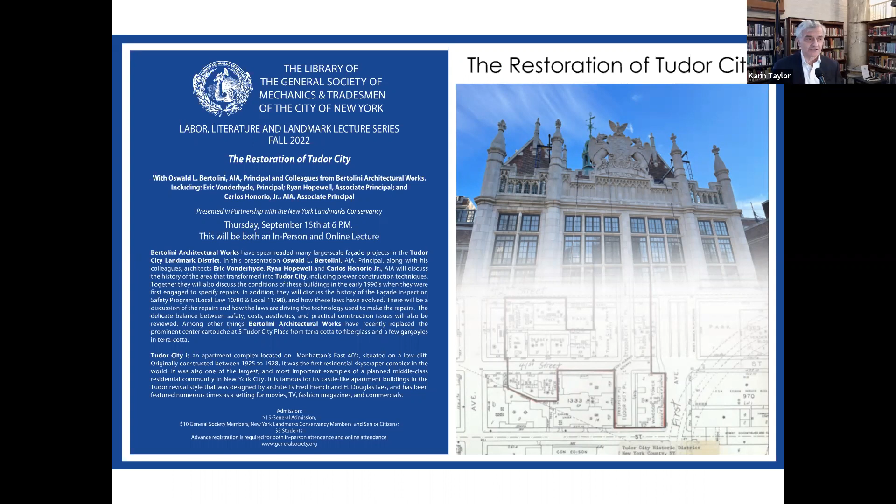I have to say it's a pleasure to be here, and I'm trying to highlight a few of the interesting points of the design and the whole ethos of what makes Tudor City Place. One interesting thing architecturally is the style of construction, but I'll focus more on the materials. The style is sort of a revival neo-Gothic, and you can see that in the buildings—some photographs are going to come later on. The most interesting thing to us is that the building has some noble materials, like granite at the base.

There's some limestone at the base of the building, the first and second story typically. But as you go up, you have the body of the buildings developed in common brick, and they have heavy ornamentation, which as soon as you get up, it's all made of terracotta.

This is a very interesting material, and that's what I want to talk about, because people sometimes don't recognize it for what it is. It is the element that we have to work the hardest on, and it's the most complex to repair, replace, and preserve over the years.

Originally, terracotta was considered a fantastic material. It was a huge progress, and it had a lot of advantages for the developers of the time. First of all, it was way cheaper than real stone, so that was a huge plus.

Then, as a material, it was fireproof. In addition, it was much lighter than full stone, because as you'll see later, terracotta is hollow. And to top it all off, it was pretty much waterproof, because part of the process ends with a glaze, which makes it totally waterproof. So except for the joints, the water didn't go in.

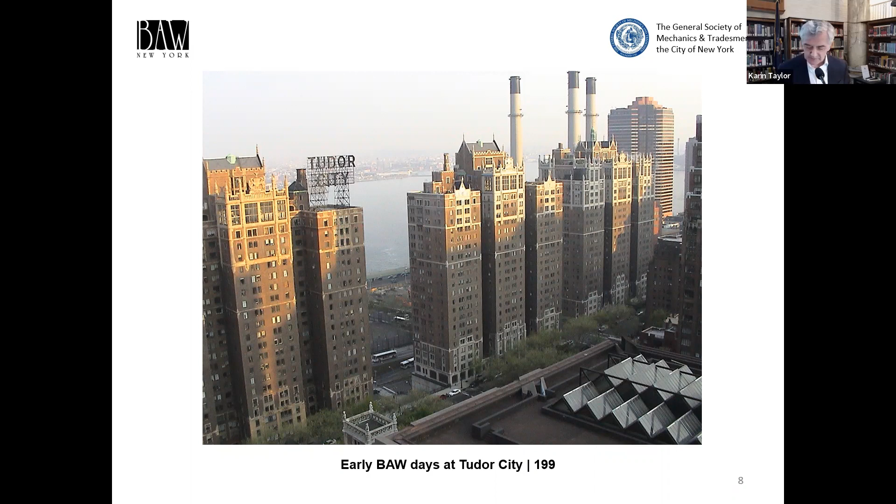This will give you a sense of what we saw when we first got to the buildings. That was in 1999, eight years into our mission of trying to save the buildings. The terracotta has been removed there, and if you look inside, the dark part is rusted steel.

We had to do several deep interventions, not only to repair the exterior fabric, but going in there and, in some cases, reinforcing or replacing some of the steel members. The buildings are very noble, they're overbuilt, and they work as a mixed structure, so nothing collapsed. That was a little miracle in itself.

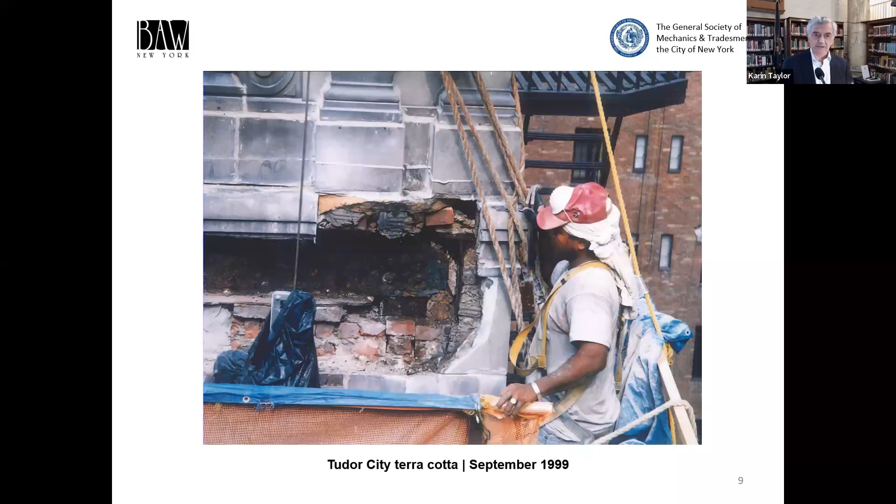Part of explaining to you what terracotta is—I think some people have a sense, but basically it's clay, very finely ground and selected. There are few quarries where you can get materials that perform well, because you're looking for consistency, you're looking for color, you're looking at how this will react when it gets baked in a kiln.

As much as it will look like stone when it's all done—this is an old original drawing, not from these buildings, but it shows how this used to be put together. The terracotta is hollow, and some of the voids are filled with masonry, basically brick and mortar. There are hooks, steel clips, and double angles back to back that hold it into place when it projects a lot, typically in cornices and elements like that, and some balconies too.

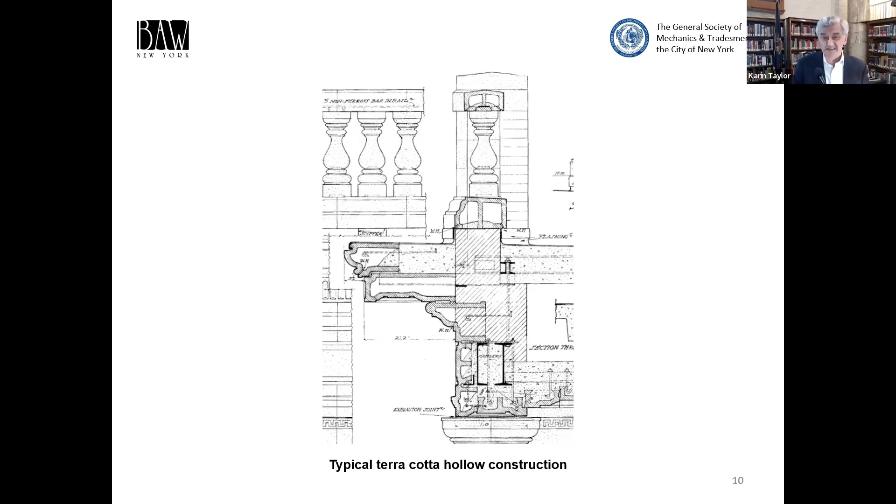So terracotta, when you look at what goes into the buildings, is much heavier, denser, thicker, and, like I said, glazed and waterproofed.

The other consequence I want to note is that once the terracotta becomes porous and water comes in, it starts a pernicious process where the steel inside gets rusted. Steel grows by a factor of 7 or 8 when it turns into rust. Even though rust isn't that strong, it's stronger than most stones and definitely stronger than terracotta, so it will crack it very easily.

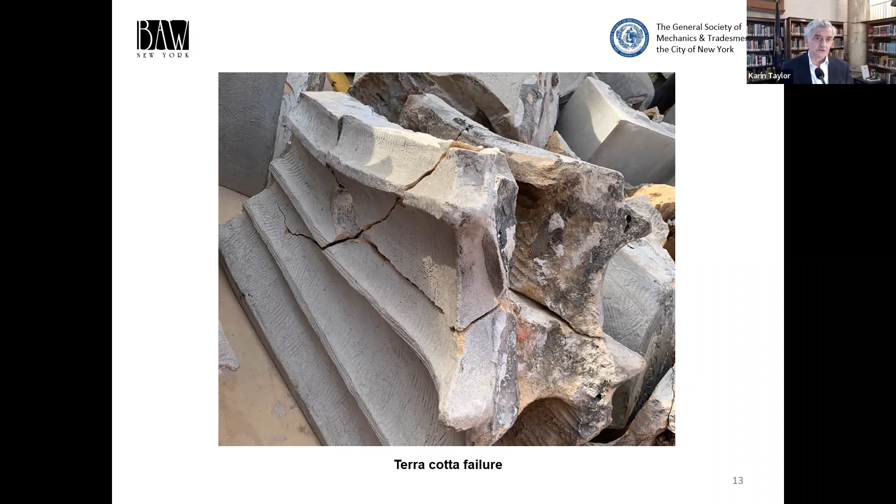So the cracks develop slowly, and water comes in, dirt and contamination come in, water flows through at some point, and eventually it produces cracks that go through the entire unit of terracotta. This makes it hard to repair, but also when it collapses, it becomes a catastrophic failure—sudden, unpredictable. You just can't go by the cracks you observe on the surface.

It's important—there's been a refocusing of the energies of the Department of Buildings over the last, I'd say, 8 or 10 years. They've toughened up the regulations to make sure everybody walking around these buildings is safe. And with good reason.

If you're looking at that, this is a perfect example—this is not Tudor City Place—of how an entire section can collapse suddenly. In this case, you see it became loose and just went down to the street, and most of it seems to be a relatively recent crack. You don't have the dirt of something that's been open for, say, 10 or 12 years.

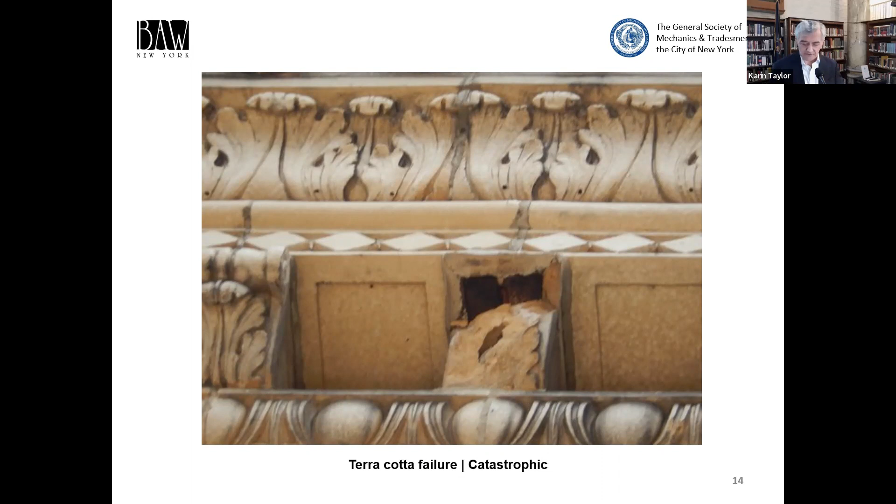That's another example of a critical failure, a catastrophic result. There's no other choice than to rebuild it, like we say in the trade, to the bone. You need to go down, remove everything, figure out how it's put together, and restore the steel substructure that holds it. It's not a real structure like columns holding up your floors, but a substructure that projects from the building—it's cantilevered—and then you build the terracotta around it.

The process is delicate and complicated for us to design. My partner Eric would say it's a lot of fun because we never know what we're going to find once we do the demolition, which is always interesting. We make our best guesses—we have fun doing this in the office, guessing how the structure runs inside. When we do the demo, maybe two-thirds of the time we're right, and the rest of the time we're saying, oh my God, who did this? What were they thinking?

We just opened up a building, not here but down on Broadway, and found an amazing substructure holding up a beautiful terracotta cornice projecting several feet out over the sidewalk. It was floating, sitting on top of a parapet, with a ton of masonry above. So the weight was holding these kind of fingers of steel coming out into the street—unthinkable. But in a certain sense, it's fascinating that these buildings have been around for, some of them, over 100 years. In the case of Tudor City, some of the construction is over 90 years old.

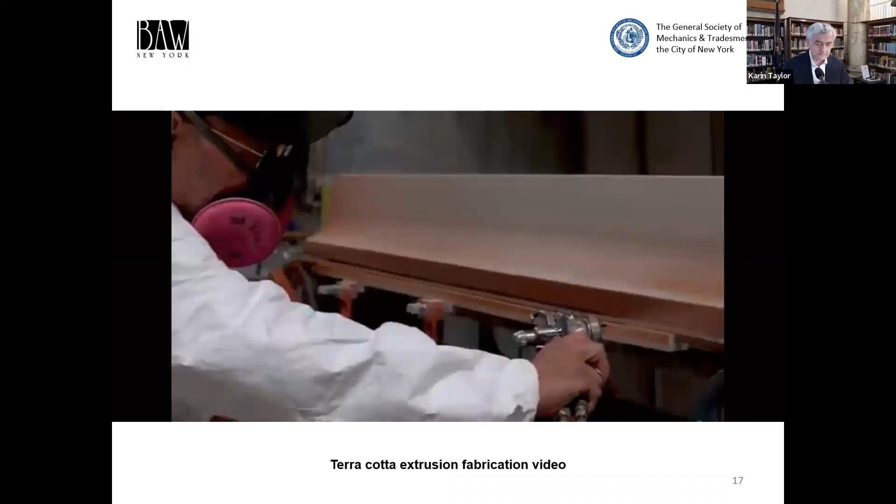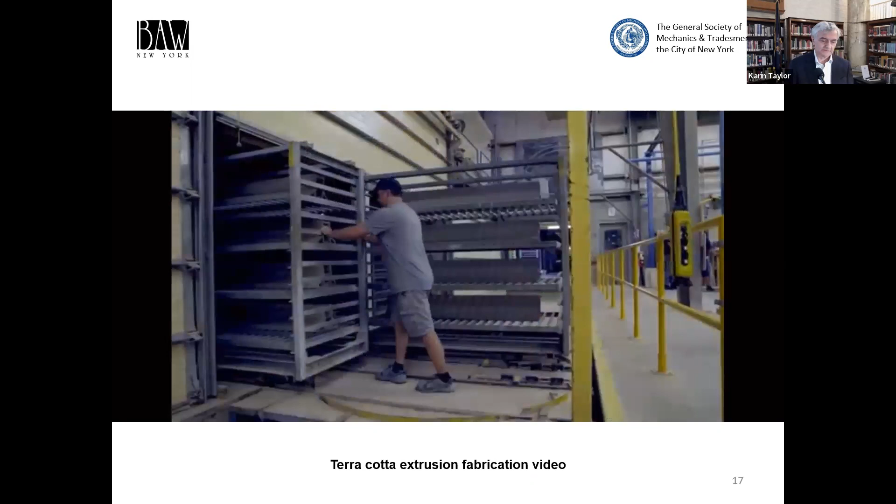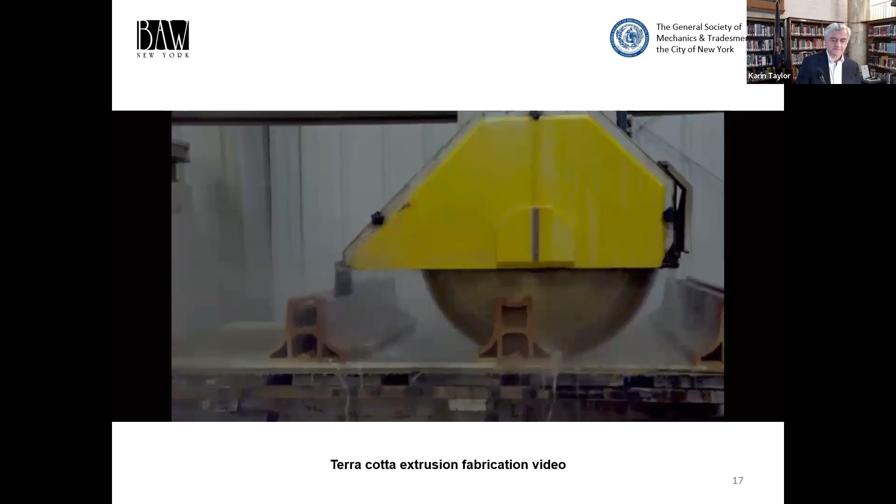Simple process for extrusion, that's all identical. That's a more traditional unit being built by hand. As you can see, you have a form, they're placing all the terracotta and pushing it into place, and then that's going to be dried and go to the kiln.

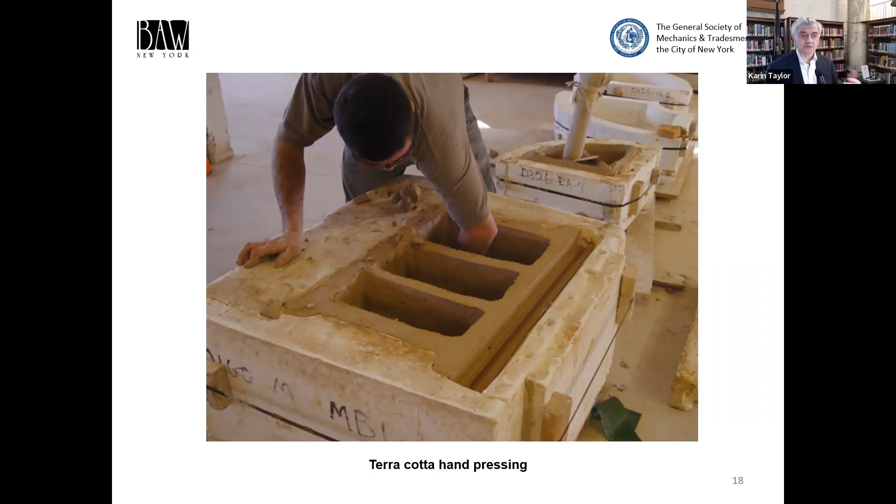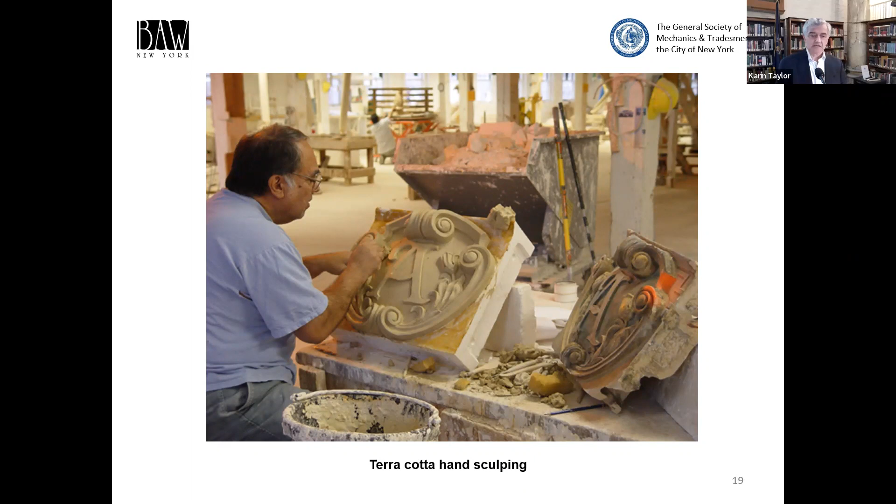The more delicate piece, as you can see, is done and then touched up by hand, which is why these things take so long. It's set up dry first because before you go to the site, you want to make sure that everything fits.

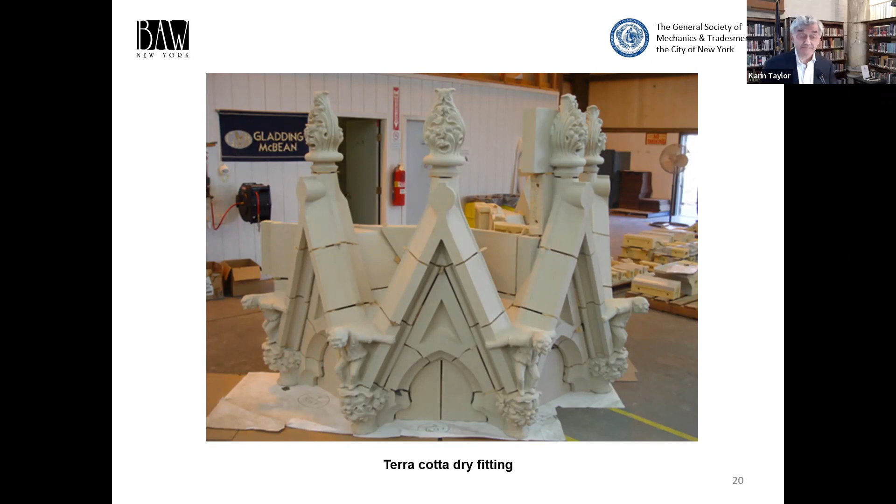We've also worked on many aspects of these buildings' restoration, but it's very important to understand the team effort and cooperation we need from everybody. We work with the Department of Buildings, the Landmarks Preservation Commission, the management companies that run these buildings, and very closely with the boards, who need to take care of their finances, and with the contractors, who do a fantastic job. This is not easy by any means.

You'll see some pictures down the line. And of course, all of this is done with the residents in the building. We appreciate their patience and the love they have for their buildings, because sometimes they're kept off their terraces, or they have pipe scaffolding in front of their windows for weeks and weeks. They do love the buildings, and I think they're gorgeous. We're happy to work with them and be part of the process.

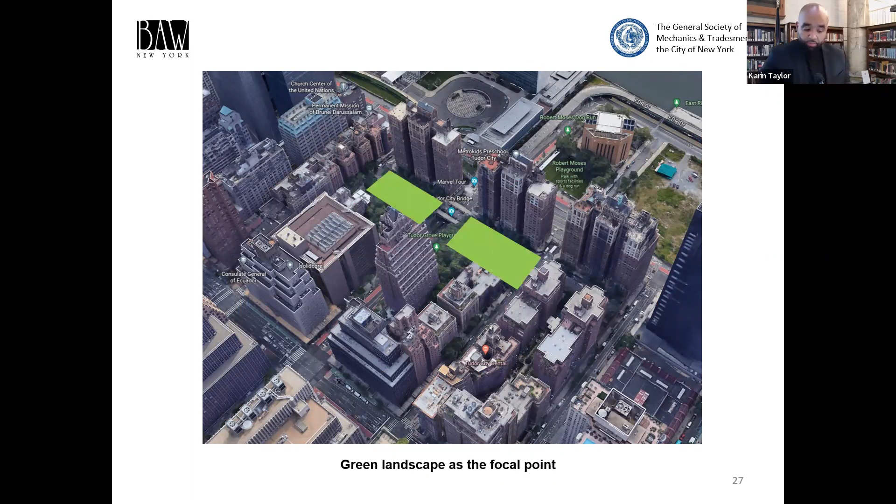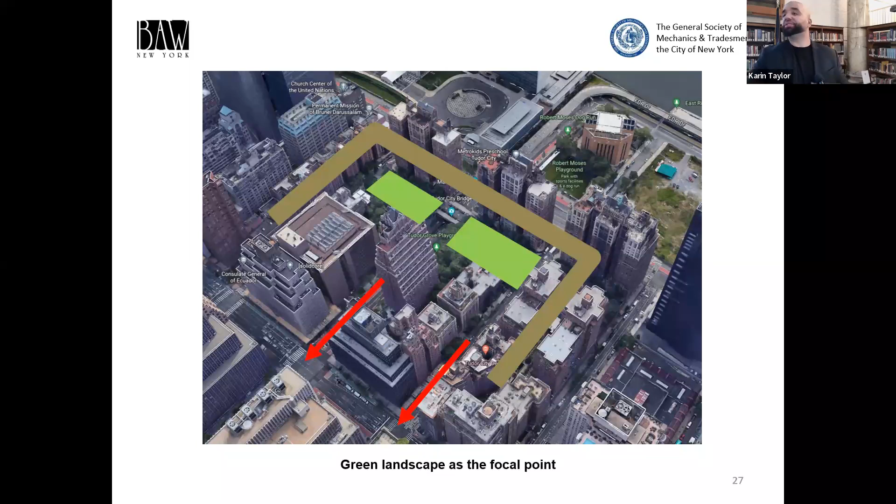The way we interpret the master plan of Tudor City is essentially a robust green landscape as the central focal point, shown there, with the surrounding buildings, and close proximity to Grand Central. That was the key selling point when trying to attract residents. The whole idea behind Tudor City was a city within the city, close to transportation hubs and within walking distance of your office.

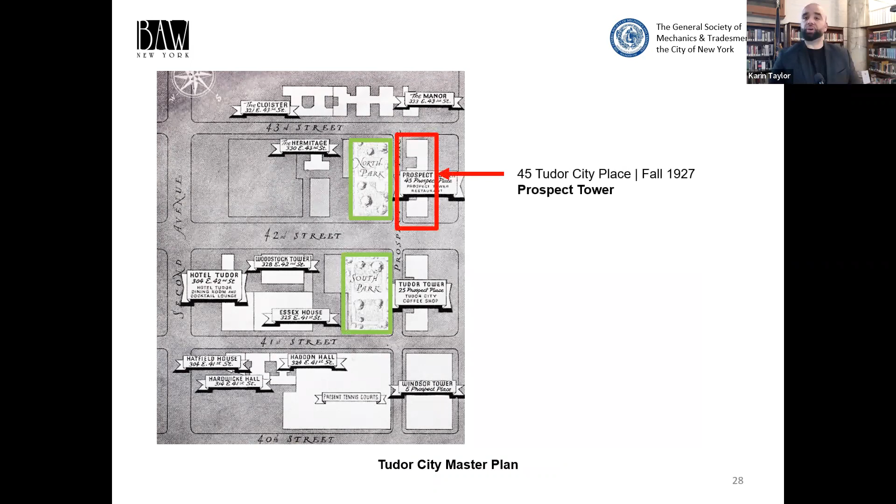I'm just going to highlight the parks. There were 12 buildings constructed originally as part of the master plan, and here are their completion dates.

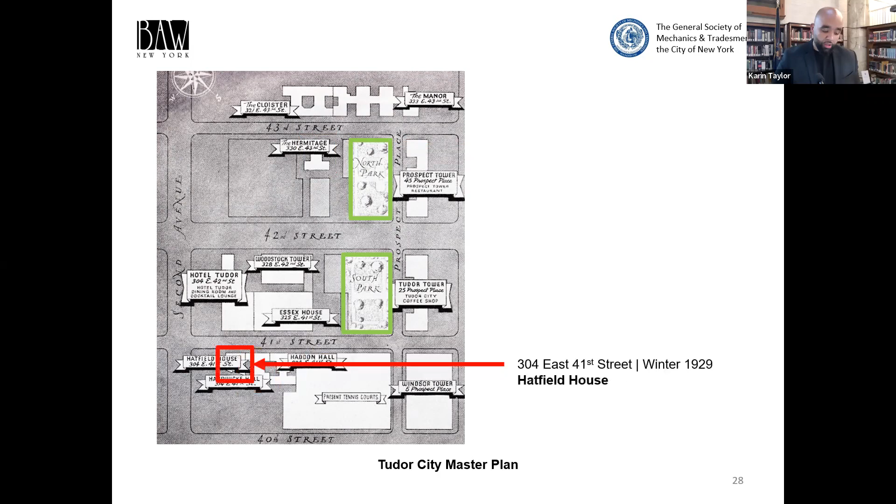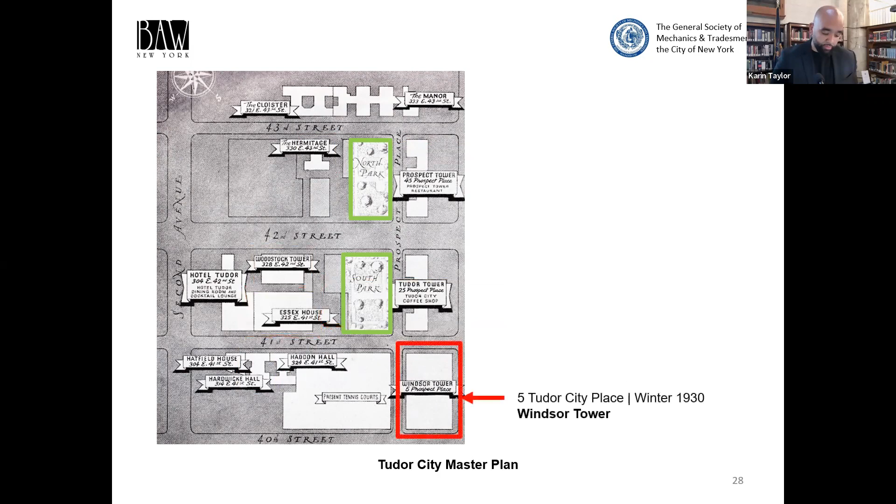That's Prospect Tower, 1927. The Manor, 1927. Tudor Tower, 1928. The Cloister, 1928. The Hermitage, 1928. Haddon Hall, 1929. Hardwicke Hall, 1929. Hatfield House, 1929. Woodstock Tower, 1929. Essex House, 1929.

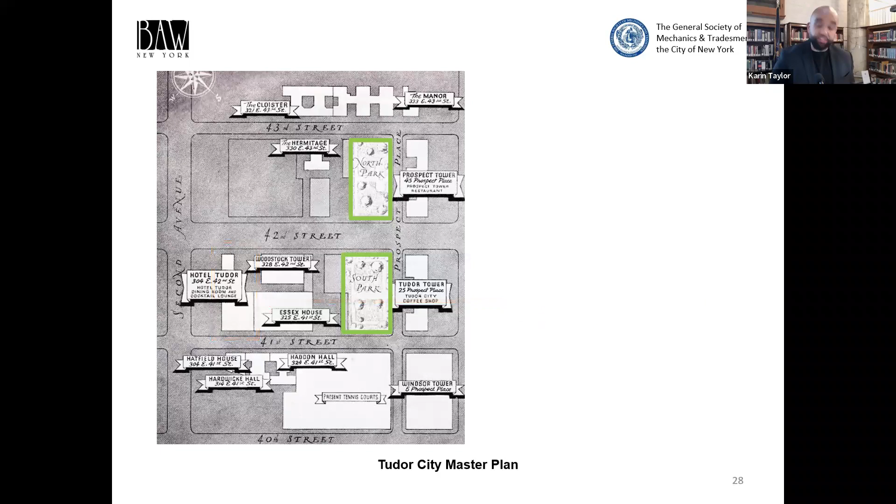And Windsor Tower, 1930. And Hotel Tudor, 1930. So those were the original 12 buildings constructed. Then in 1956, Two Tudor City Place was built, which is called Tudor Gardens.

Now, the area was much different back in the late 1800s. Here's a photo of 42nd Street looking up north on 2nd Avenue.

Before the United Nations, First Avenue was lined up with slaughterhouses, infamously nicknamed Blood Alley.

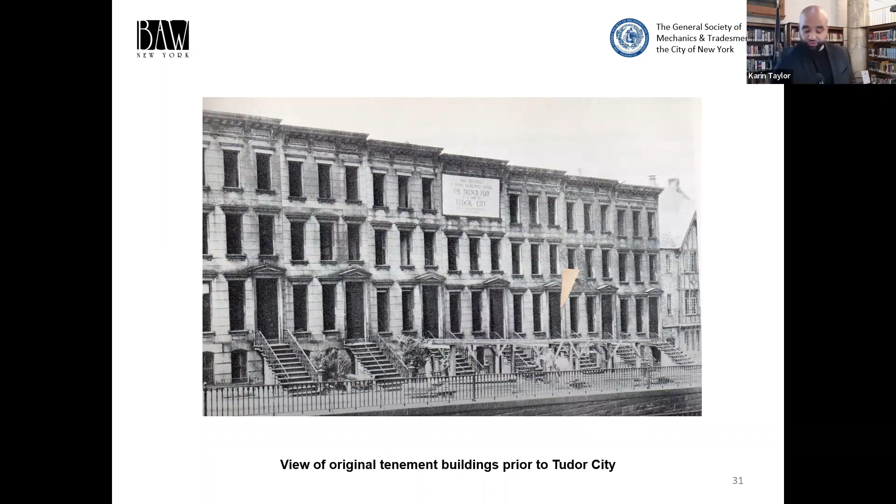The existing tenement buildings help mask the beauty of such a potential site. Fred oversaw all of the obstacles and pushed forward with this unprecedented project. Another picture of the tenement buildings there being bought by Fred.

During the Roaring 20s, Fred was able to attract numerous investors through rigorous ad campaigns to raise the capital required to develop the project. Too bad I was 60 years born too late, I would have invested.

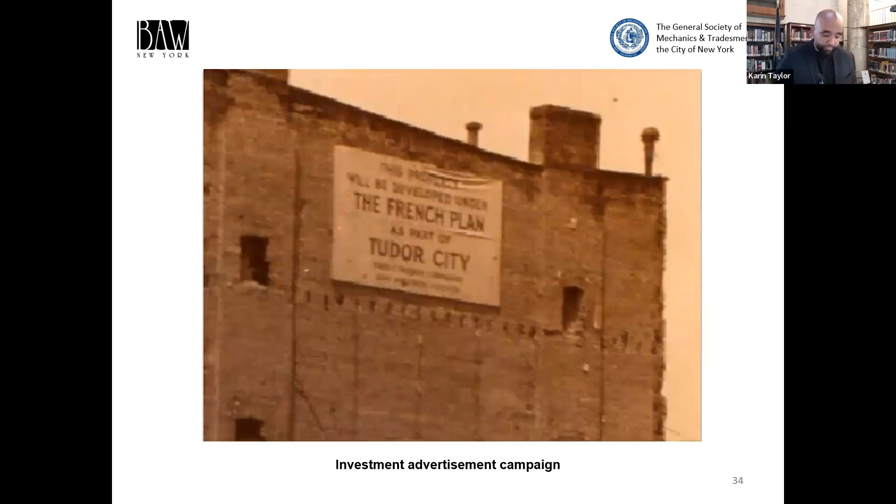Again, the ad campaigns pretty much plastered all over the tenement buildings around this area. Stock certificates, wish I had one.

Fred wanted to provide an outer urban experience within the city, which incentivized those that appreciate walking to work. He advertised Grand Central, one of the city's main transportation hubs, which had major impact on its development and thriving, and was part of the marketing campaign for future residents, as you see here with this ad.

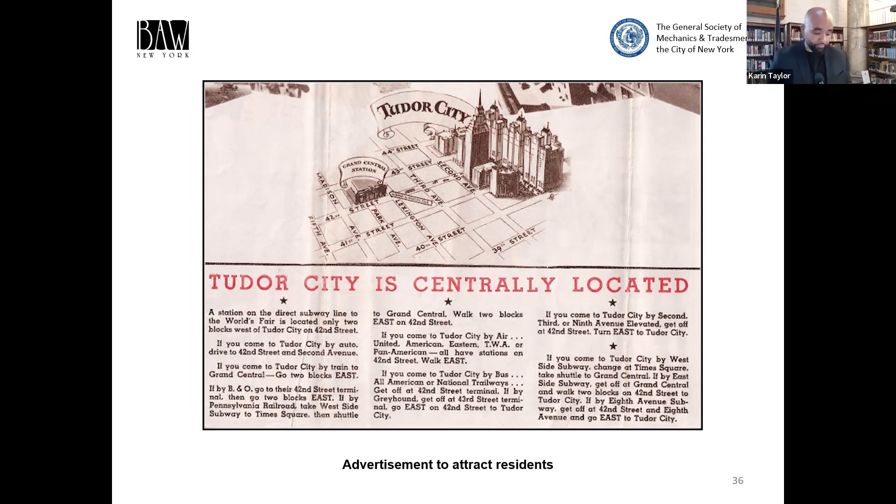Another ad, and one more. I won't go into the details of that one, but you can get what's going on. Tudor City Green Landscape is an overview.

There is a tennis court in front of 5 Tudor City Windsor Tower, and then you have two parks, north and south.

I don't know if it's a myth, but Fred used to pay professional athletes to visit the park as guest appearances. I don't know if that's true or not.

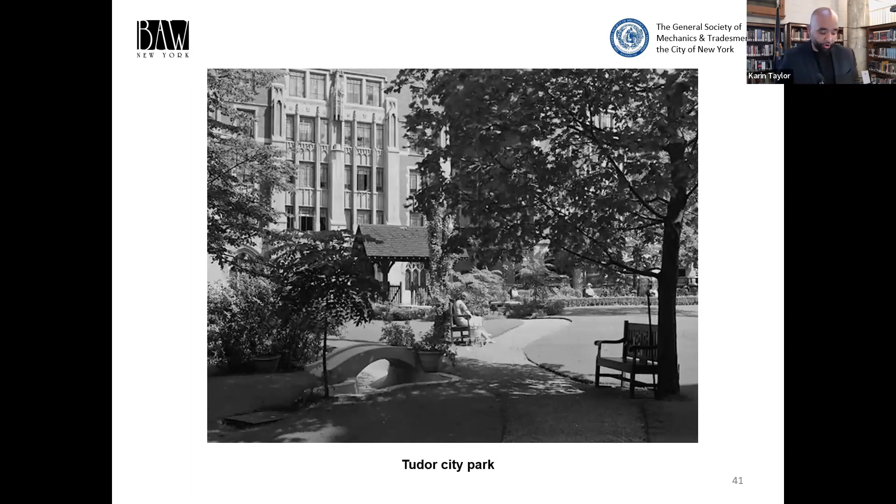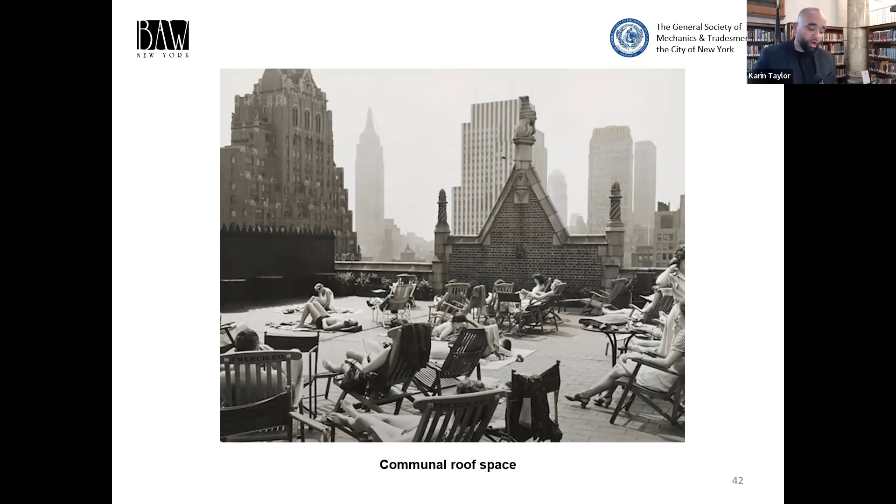View of the park, and also you have communal roof spaces. You have a dense population within this area, so part of it is to provide communal spaces. This is a picture atop 45 Tudor City Place.

All right, so now we're going to talk about construction type. The exterior is pretty much cladded with non-glazed solid brick masonry walls, and most of its weight is sitting up top the perimeter spandrel beams.

Decorative facade features, we have terracotta units that are used to mimic the Tudor revival style. Base floors were cladded with natural stones such as limestone, sandstone, and granite.

It's a steel frame building. Structural beams are encased in cinder concrete, while the columns are encased in either brick masonry or terracotta hollow units. The floor is cinder slab concrete construction.

And this is a schematic detail. This is a typical detail of what you've seen back then when constructing buildings. And that's what we see too when we open up some of these parapets, some of these wall areas, and Ryan will show some detailed photos of that.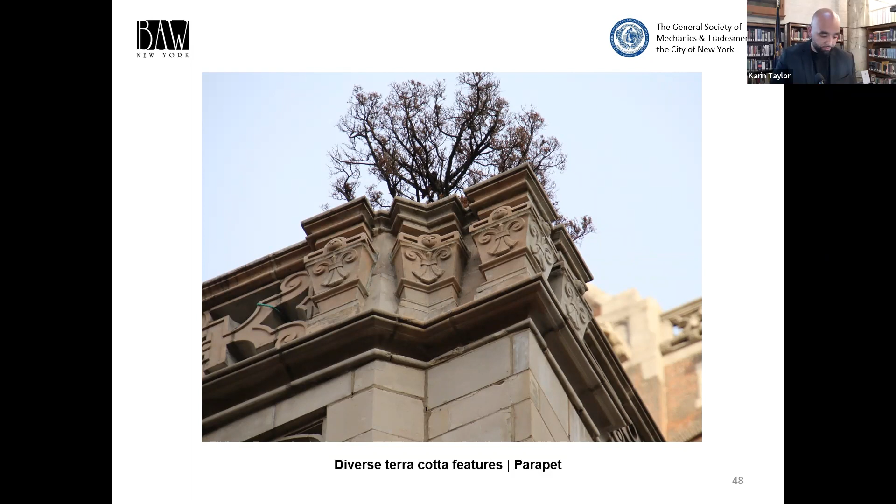We're actually doing work there. Ryan is also going to touch upon that. It's a pretty griffin, if you ask me. Bronze panels, decorative panels.

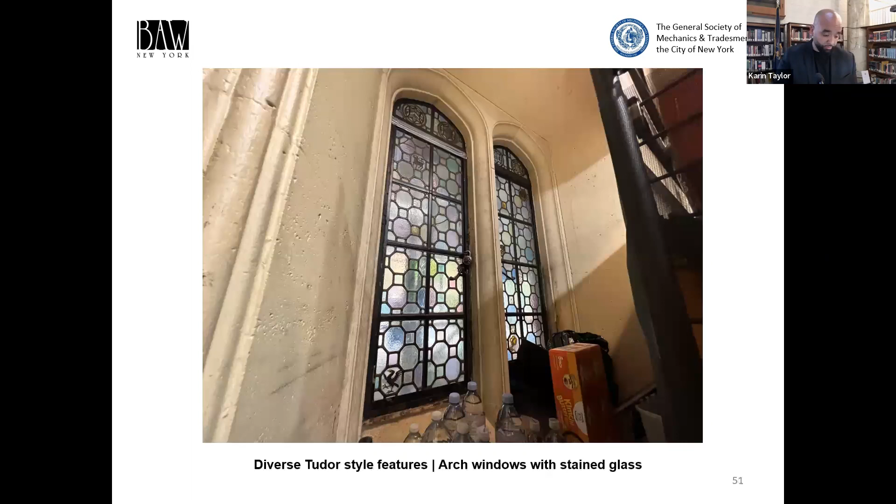Arch stained glass windows. Skylights, stained glass as well. This is original to the building. This is at the Essex House lobby.

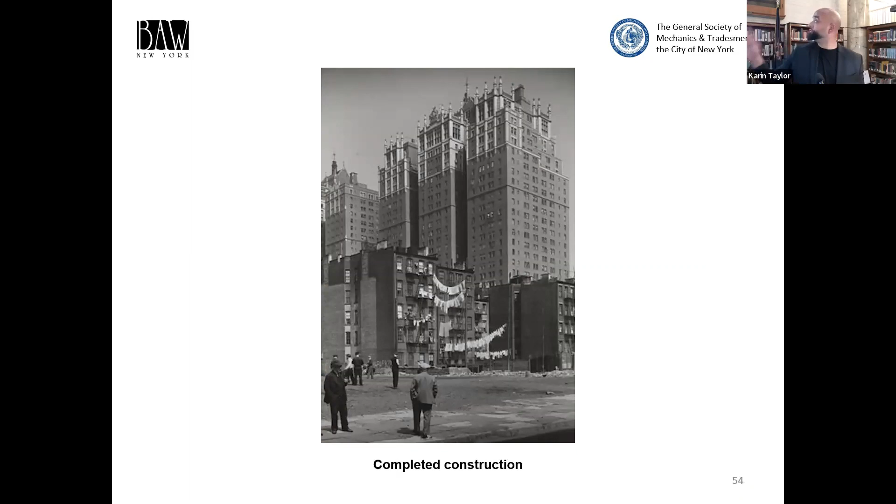And then this is 5 Tudor. This is an overview of 5 Tudor.

Now I'm going to touch on the Tudor City sign. Everyone's kind of familiar with the Tudor City sign, but not sure if everyone knew that there were actually two signs. This is the one that's still there today, on 45 Tudor City Place, the northern side of 42nd Street.

This is how it looked at night. And this was the original thinking behind it: Fred wanted it on both sides of 42nd Street. Unfortunately, they built a building in front of it. Fred built a building in front of his own sign.

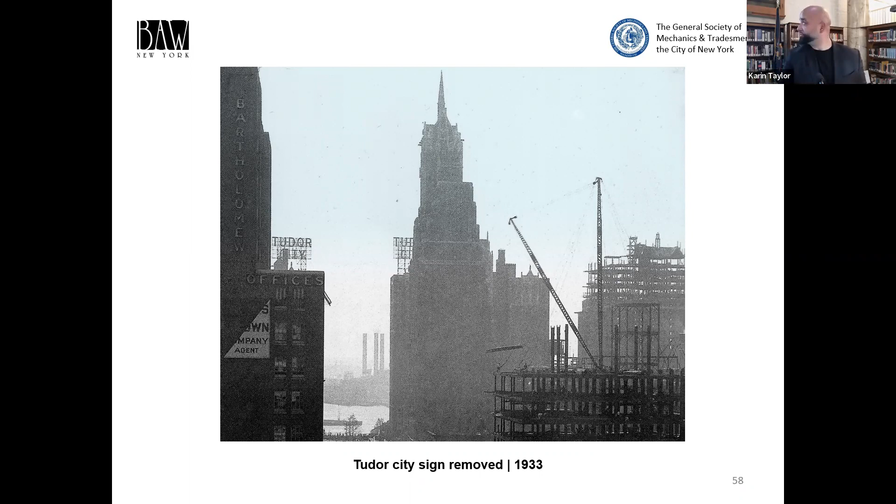Long story short, once the building was built, he realized that you can't see the Tudor City sign, so he removed it in 1933. The new kid on the block, the United Nations, was built in 1952. You can imagine if you had a terrace in Tudor City, you couldn't essentially use it when the president was in town, so that was a big problem.

The benefit of having the United Nations there is that they widened 42nd Street. It went from 60 feet and ultimately ended up at 100 feet wide. So what did that do? The byproduct is they were able to build the Tudor City Bridge. And I'm pretty sure you guys know about the iconic shot, right? Summer equinox, you can see the sun set right down 42nd Street.

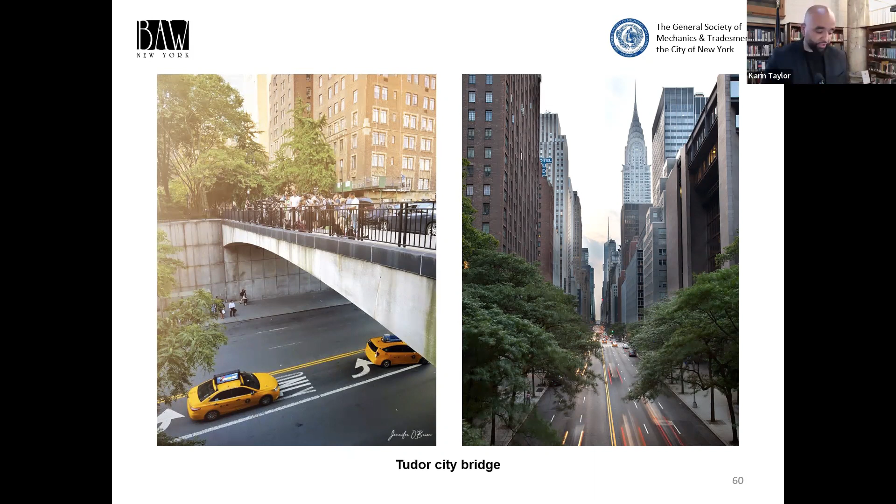And then in 1988, Tudor City became a landmark district in New York City. So as you can see, the surrounding environment around Tudor City has changed, but the spirit of the development to be a city within the city still lives on today.

The maintenance of these historic fabrics has been further preserved by the evolution of increased Department of Buildings inspection requirements, which Eric Vonderhyde will further discuss. Thank you.

All right. Good evening. My name is Eric Vonderhyde. I'm a principal at Bertolini Architectural Works. I actually joined Oswald in 1997, which turned out to be a transitional year for the facade restoration industry.

It was the year that we went from the initial facade protocols under Local Law 10, and in 1998 it became Local Law 11, which is the name that most of you are familiar with. I'm going to touch upon how these rules and regulations evolved over time, and how they've impacted the type of work we've done, the methodology behind it, and certainly the extent, which Ryan will touch upon. The current laws right now mandate that we're doing very, very extensive repairs at this moment in time.

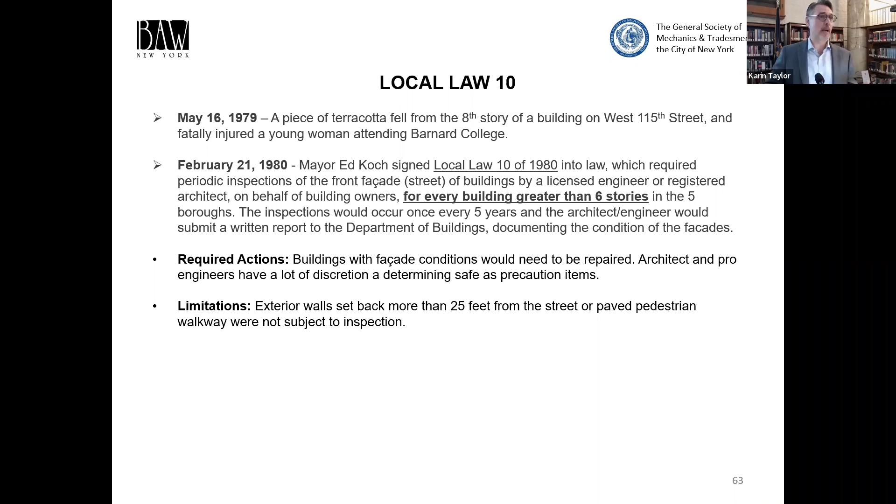So in the time from 1980 to 1998 under the 1980 law, we only had to inspect the street facade. They didn't make any of the returns or the rear courtyard facades relevant—it was purely a street facade requirement. Unfortunately, between 1980 and 1998, there were a few more incidents, and two of those happened at return facades. So they realized there was a big hole in the law and that they needed to adopt a new one.

So in 1998, Rudy Giuliani signed Local Law 11 of '98. It replaced Local Law 10, and it required us to inspect all of the facades. It also added a hands-on inspection, meaning we had to go on a scaffold and get up close. And I can tell you from personal experience, this dramatically changed the type of things we were finding.

A pair of binoculars and a telephoto lens is extremely limited in what you can see—you're only looking at it from a certain angle. So once we got on the scaffolds, around 1998, the photo that Oswald showed of the Essex with that really bad steel—that's the sort of stuff that came up when you got up close. It was an 'oh my God' moment. And that happened once they implemented the requirements for hands-on scaffold inspections.

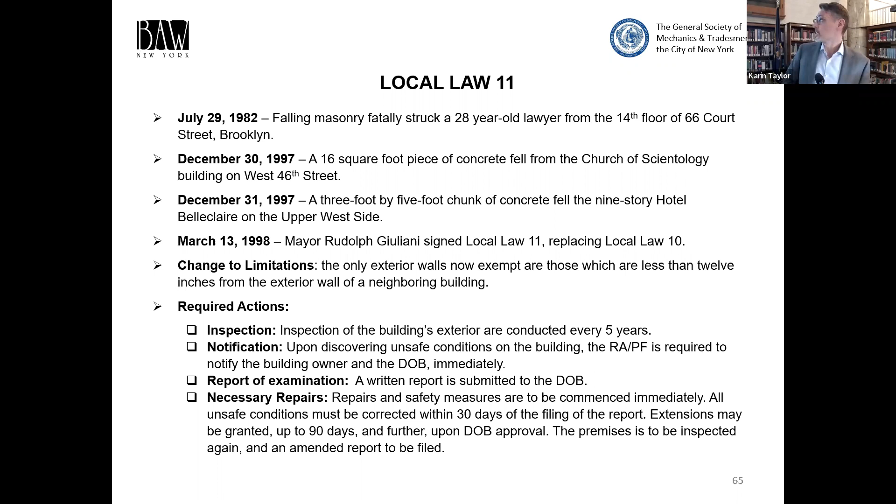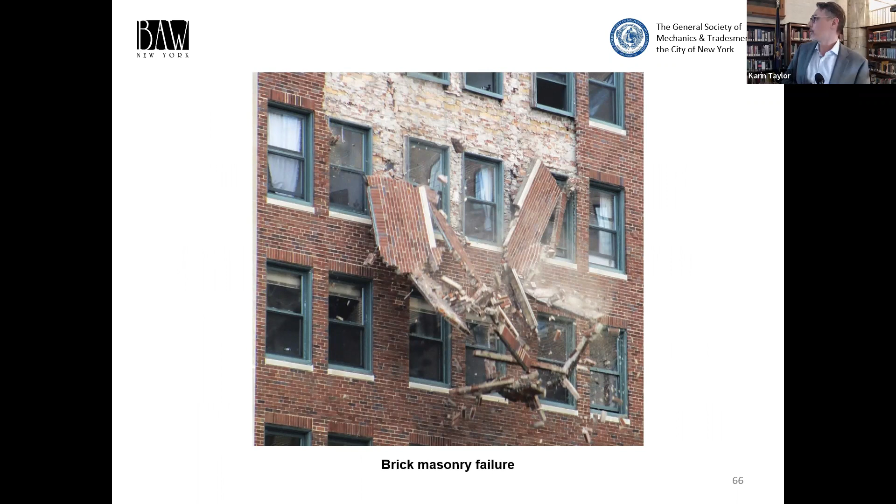That changed in 2010. This isn't an image of anything that happened with us, but I'm always interested how they captured this moment in time. This is the sort of thing that they're trying to stop by these local laws, and in fact, I think countless lives have probably been saved through these laws being in place.

So in 2010, Local Law 11 became FISP, which stands for the Façade Inspection and Safety Program. There weren't any dramatic changes other than the name change. They did add railings to the list. Unfortunately, around that time, a woman fell to her death leaning against a railing, so they made that part of our inspection protocols. They also increased inspections and enforcement by the Department of Buildings.

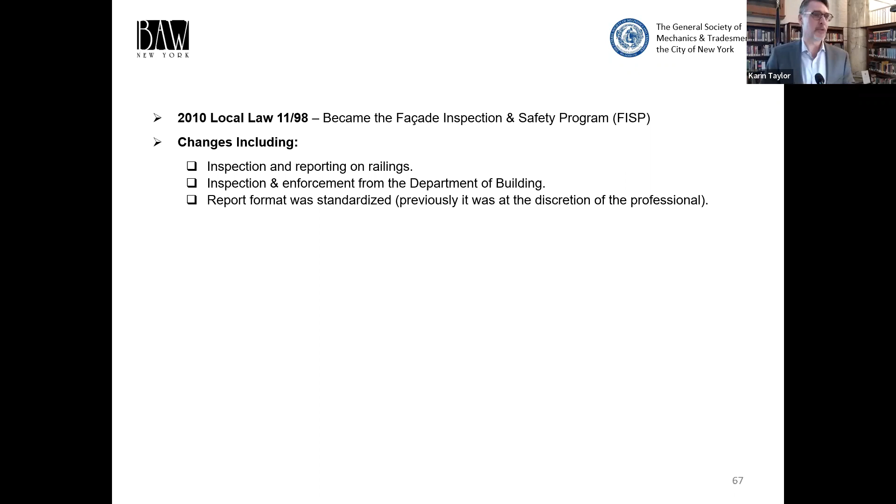This also increased the level at which we started diagnosing things. The industry as a whole, if you have somebody coming and checking on you, is more apt to list all of the things that they may find. And the last thing that they did, and this was probably a good thing, is they standardized the reporting format. Up until this point, it was at the professional's discretion what they were submitting to the Department of Buildings, and it took them forever to do the reviews and to tell us what they thought of the reports.

So here's the big one. In February 2020, they really changed the FISP regulations. They increased the number of inspections from 1 to every 60 feet. So to put that in context, a building like 5 Tudor City Place, which is one of the largest buildings footprint-wise in the entire Tudor City District, went from 1 required inspection to 15 required hands-on inspections.

So of course, we're going to be able to see more of the terracotta. What also happened, and what was a precursor to this, is we continued to have terracotta failures. So the city was really critically looking at terracotta and masonry defects, and they required us to look at them more closely as well. They added additional qualifications to be a facade inspector.

What would happen when there would be a recession or something like that, you'd get a bunch of people who would enter the profession in order to make ends meet in the interim, but they didn't know what they were looking at. So they actually made it really robust. We require 7 years of hands-on experience doing solely this kind of work in order to provide a report to the city of New York.

They expanded civil penalties. They asked us to increase our photographic evidence. You guys now need to post in your lobby the status of your building, whether it's safe, SWARMP, or unsafe. But the biggest thing that they did is they actually codified all the defects that we have to report on.

On the next slide, or 2 slides from here, we have references to the DOB website, which show these defects which we have to report on. So they sort of took the discretion out of our hands. Now when we see a defect, we have to report on it in some way.

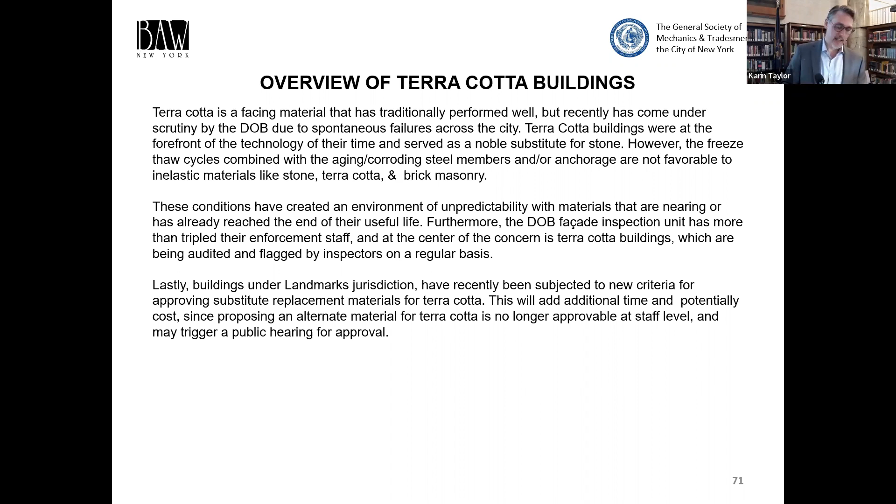So this was shown before on Oswald's presentation, but I want to touch on it as I transition over to Ryan Hopewell, because this is one of the last big facade restorations that I personally did where I was on the scaffold. And these were the kinds of conditions we were running into all of the time.

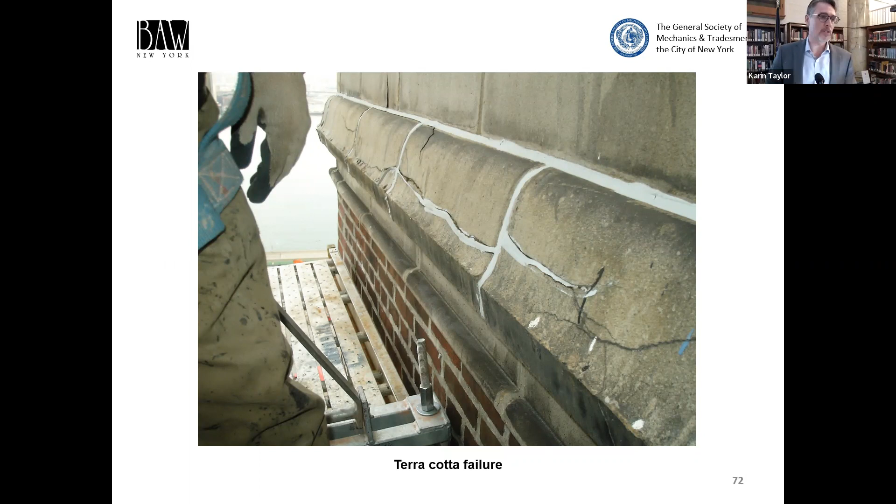So these are the types of campaigns that we started seeing. At that time, we were doing primarily patching, pinning, stabilization, until we finally turned the corner, and now we're really forced to do wholesale replacements. Ryan has a bunch of examples of those replacements.

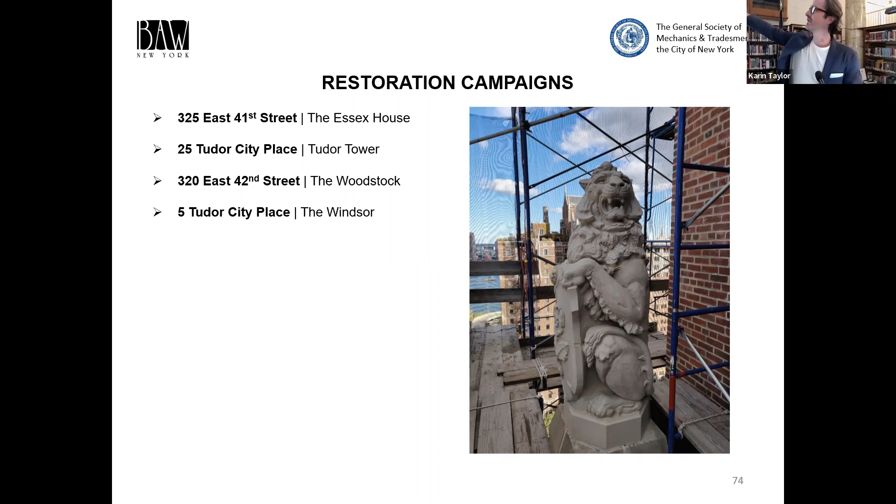So the four buildings we're going to highlight are 325 East 41st Street, the Essex House; 25 Tudor City Place, Tudor Tower; 320 East 42nd, the Woodstock; and 5 Tudor, the Windsor.

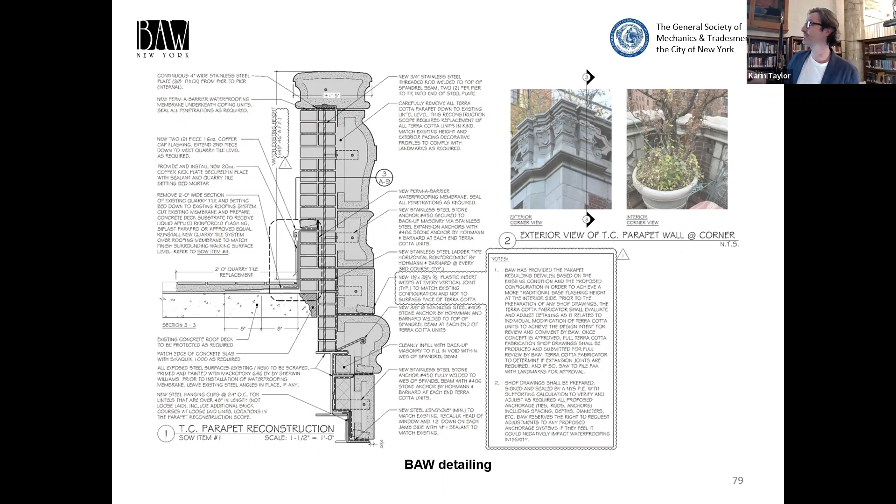So this is a typical parapet demolition at Essex House. They've got a very unique terracotta parapet, pretty much all terracotta. I wish I had a photo of it, but the point is that when you demo it, you have something like this. You've got this water table here, and as you can see, there's really no waterproofing. The original construction relied on the density of the materials, mortar, it was all packed together and relied on that for waterproofing. Over time, as Oswald mentioned, the steel will expand the terracotta, which allows more water to get in, and this is why many people experience leaks in their apartments, specifically on the upper floors.

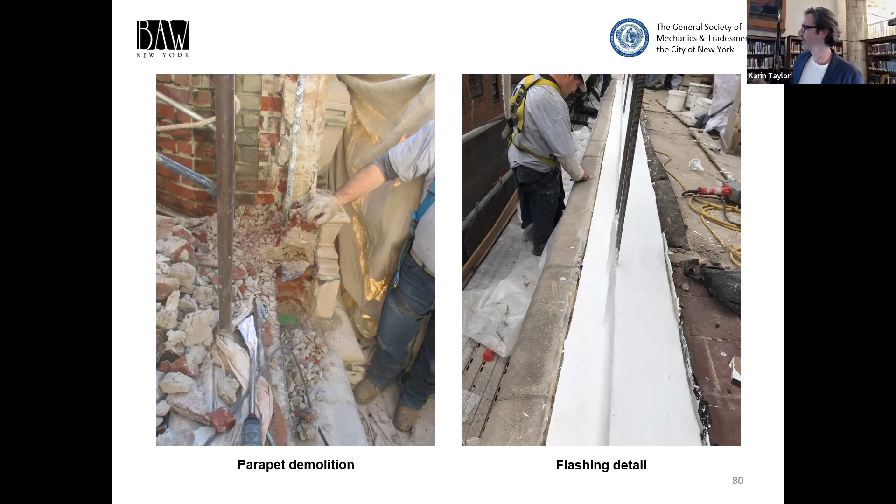So this is a demo photo, and this is the same area, where we've now introduced a more modern type of waterproofing. We've got a through wall flashing that goes from the roof to the outside, and we've also introduced steel reinforcing. Here's another photo showing the steel reinforcing - this is the contractor dry setting the stones to make sure the reinforcing aligns with the original holes. This photo shows the parapet roughly 3/4 complete, it just needs coping to go on top.

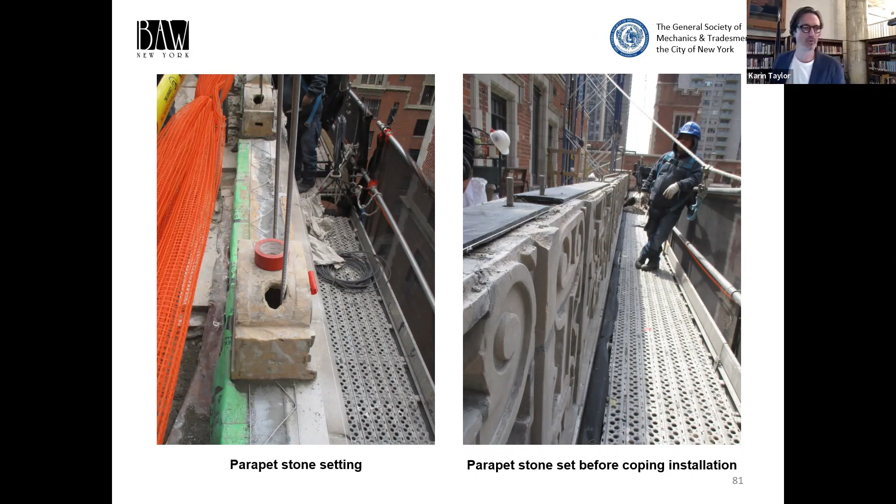Very interesting fact - there are 3 of these ornamentations in Tudor City Place, at 5 Tudor, 25 Tudor, and 45 Tudor, all exactly the same except 45 Tudor has a different colored terracotta. So 5 and 25 are identical down to the half inch. Actually, we measured this multiple times - we had a laser scan done of these, and it is within half an inch. So even in 1929, they were paying attention to the details.

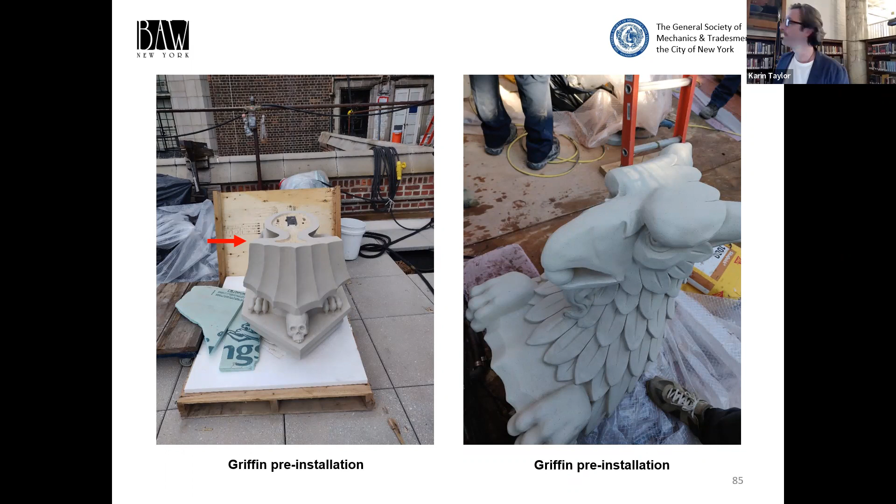All right, now we're going to jump to 320 East 42nd, the Woodstock. So the photo on the left may not look like anything, but it's actually what the photo on the right is sitting on. There's a lot of interesting components here. So this is the steel substructure that actually supports this, and the green membrane here is the waterproofing.

So the waterproofing acts as twofold in this case. One, it protects the steel from getting wet and corroding. And two, this membrane keeps the water from either percolating down, and also acts as water management to keep the water out of the element and towards the face of the facade.

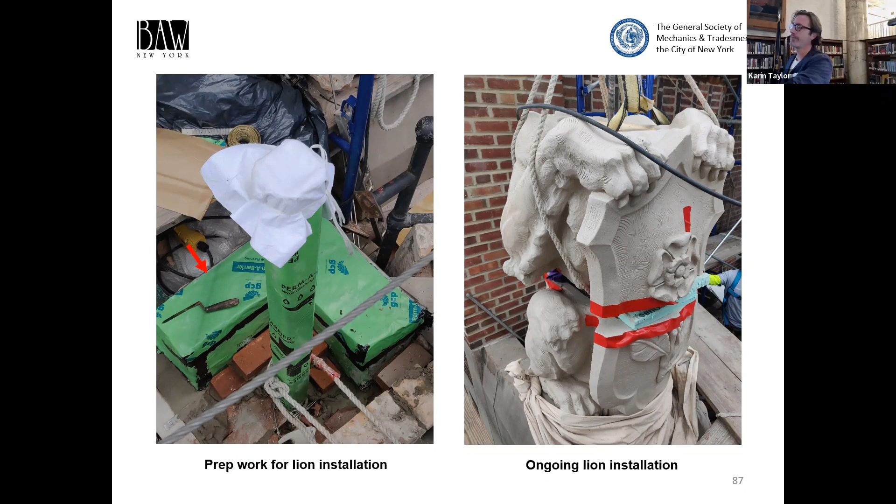And this is completed. He's an angry guy, but it's cool, right?

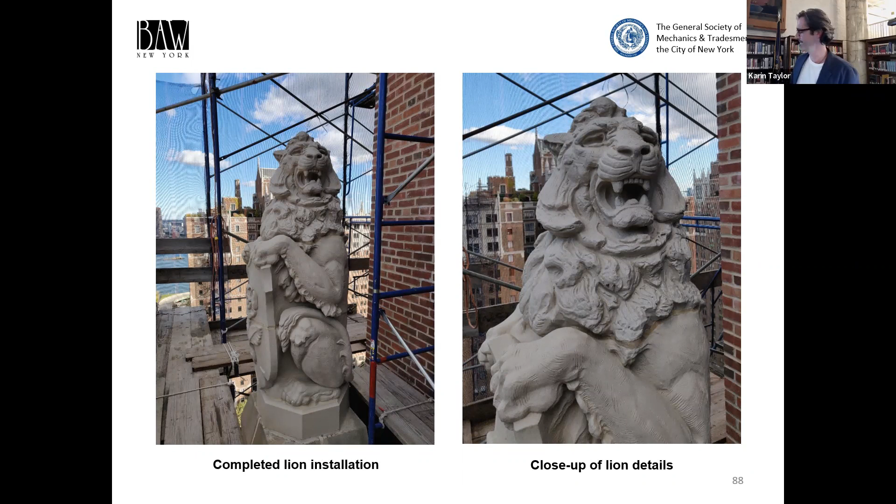All right, that's all with Woodstock. And now we're jumping into 5 Tudor. So this, of all the campaigns we've done, is by far the largest restoration. There's too many things to go into, but we're really going to hit the big elements.

Again, the cartouche. And then we also rebuilt all these spires. Throughout the 10 penthouses, there's 34 spires, which were changed with cast stone. We have a sample of that here - this is cast stone, which is a very noble material, but it's much heavier. Afterwards, you guys can feel the difference between the two, but it is a very good substitute for this type of construction.

So we're going to start with the cartouche. These are some of the schematic drawings we started with when we began the initial planning for converting it from terracotta to fiberglass. So we came up with these drawings.

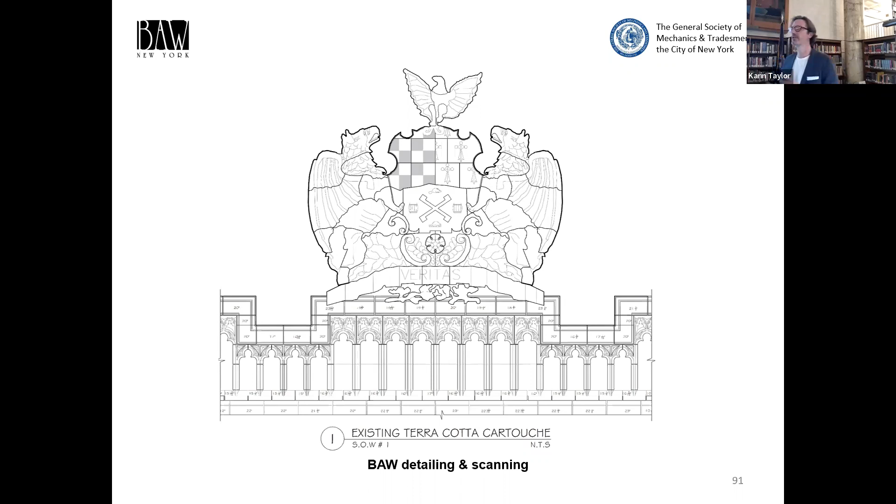We had them scanned, which is a very accurate technology. It takes it down to a 32nd of an inch. We had it scanned, put it into AutoCAD, and mapped out all the joinery. Then we submitted our proposal to Landmarks. They had questions, we went over them, and ultimately got the proposal approved.

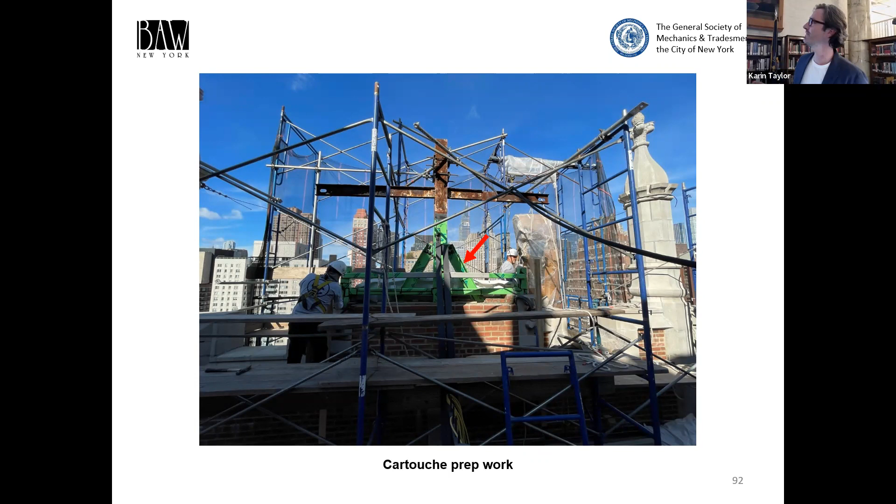This is what it looks like once the cartouche was demoed. You've got your waterproofing here protecting the steel. It doesn't look as big in the photos, but when you put it up, these guys here are probably 6 feet tall. This is a huge element, a very huge element.

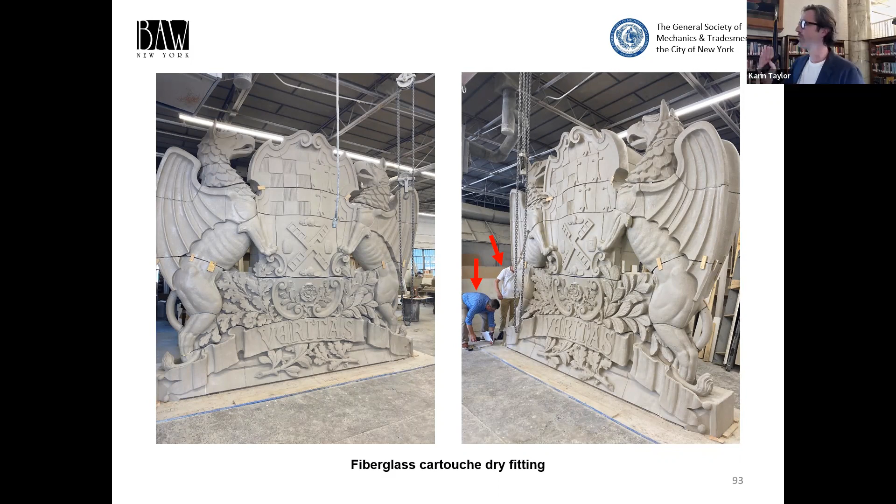And this is totally in fiberglass, so this is a dry set. When we initially started the manufacturing process, we had a lot of communication with the fiberglass manufacturer and their engineer, because there was a lot that went into this. The original construction relied on the heft of the material. When you convert it to fiberglass, yes, you can do it, but there are some constructability issues, typically related to moment, since this engineer was worried because it was so tall.

This is a video of typical fiberglass. While we were there, we captured this video showing how they make fiberglass. There's a glass mat, and then they spray resins on it to build it up.

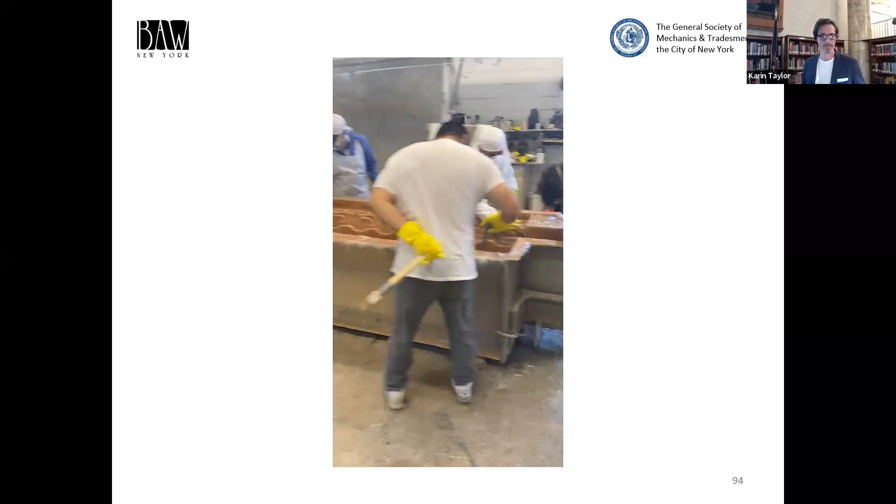One quick second. Go ahead.

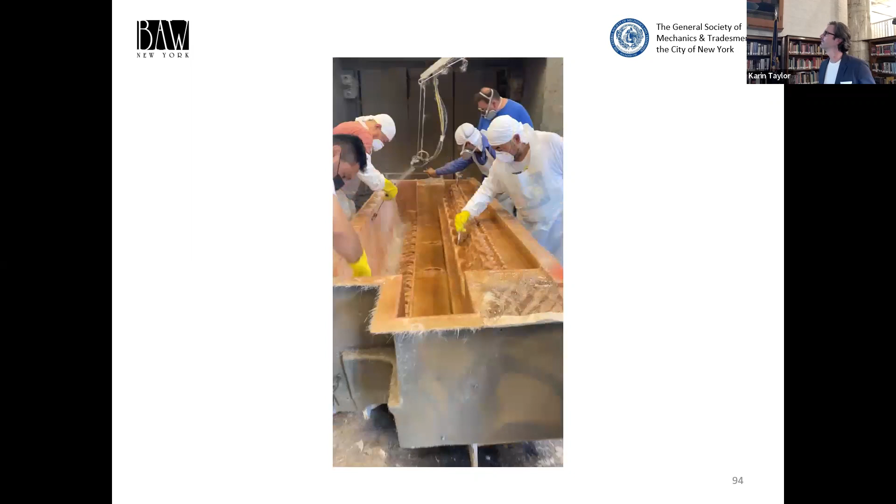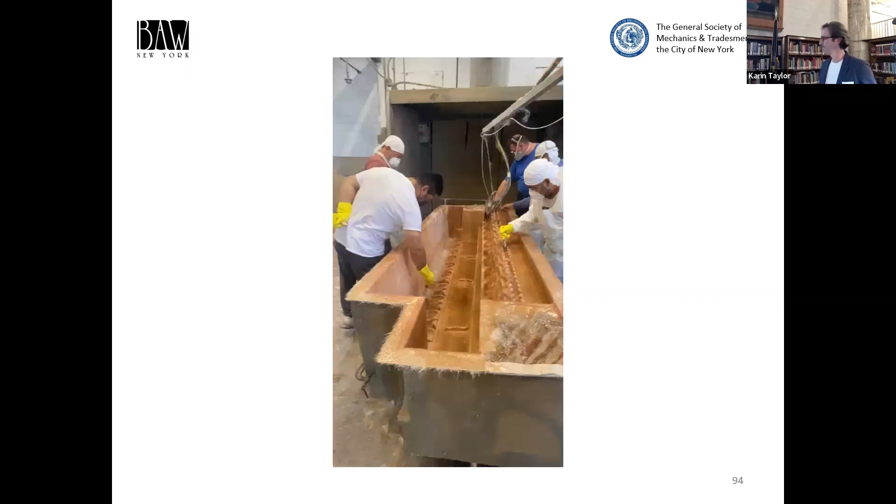So what we did here is we infilled all these lower areas with brick to act as a ballast, because at this point you can see the thin shell. We needed something to add some heft to it. So the engineering calcs came back, and we had to fill these lower pieces as much as we could with brick and mortar to add that weight.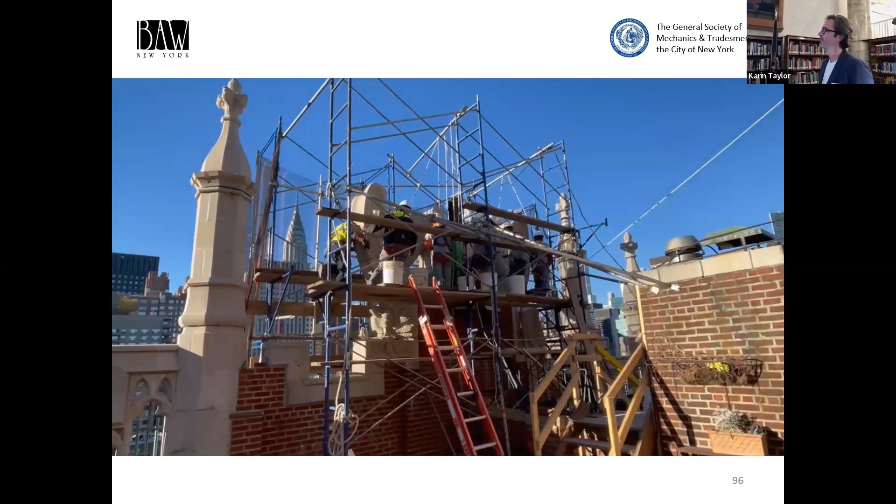So this is a photo from behind it. Something I'd like to point out now is that you saw this large piece being set. Interestingly, originally it was many more pieces. We reduced it down to 4 pieces.

What we did was we mimicked the original joinery with faux joints. So if you go and look at it now, you've got sanded caulk joints that mimic the original mortar joints. So we reduced the weight and increased the size of the pieces, but also maintained the fabric of the building by keeping the joinery.

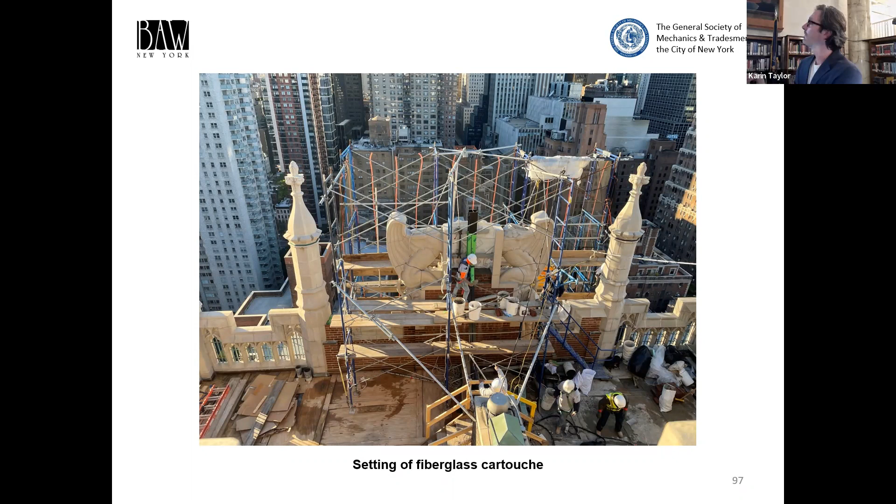So now we're going to discuss a little bit of the spire reconstruction, which again, this is the cast—oh, I'm sorry, this is fiberglass. So this is essentially what the cartouche was made of.

All right, so we'll discuss the spires here. Again, you've got your typical waterproofing, protecting the steel and keeping water out of the building. These are cast stone units, and you can't really see it here if you were to zoom, because we add so much weight to these spires. The original terracotta were heavy, but not as heavy as cast concrete, so we actually install intermediate plates to help support the units above.

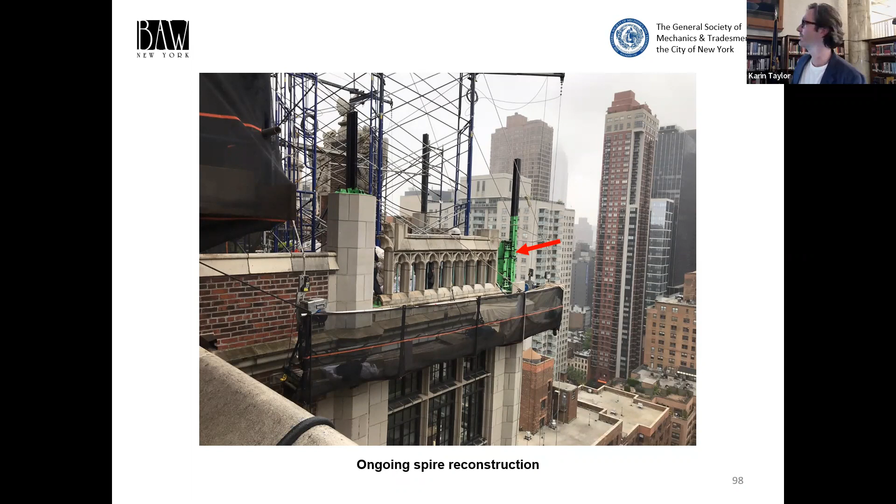So here's the joint across the shield that was introduced. This is the dry set in Boston Valley's shop. And this is an up close completed photo of it.

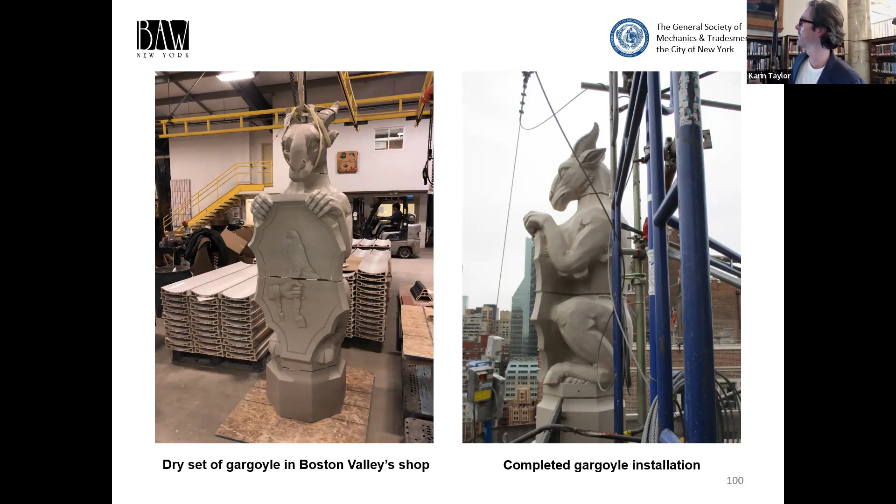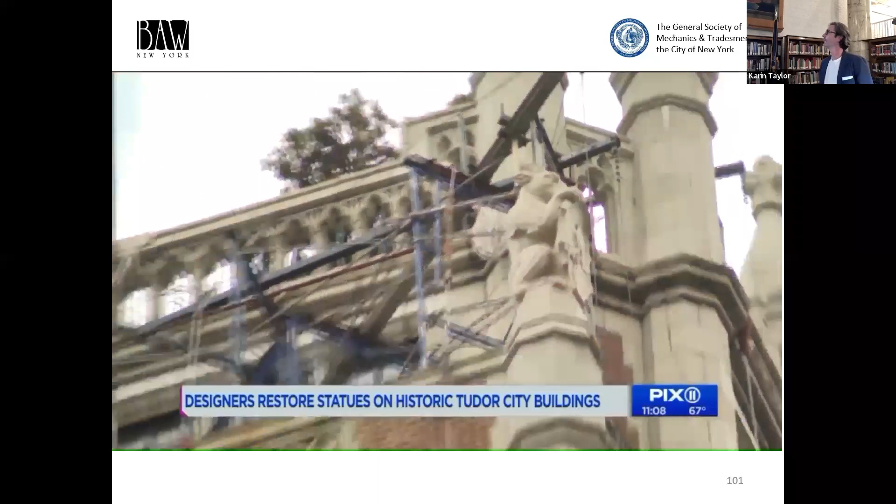We've got one last video here. Look past the buildings in the skyline, see the creatures watching over you—looking down on us is a better way of putting it. Gargoyles and statues stand at attention right on the edge. Get up close and personal on the roof of one of the historic buildings in Tudor City. It's something to be standing here.

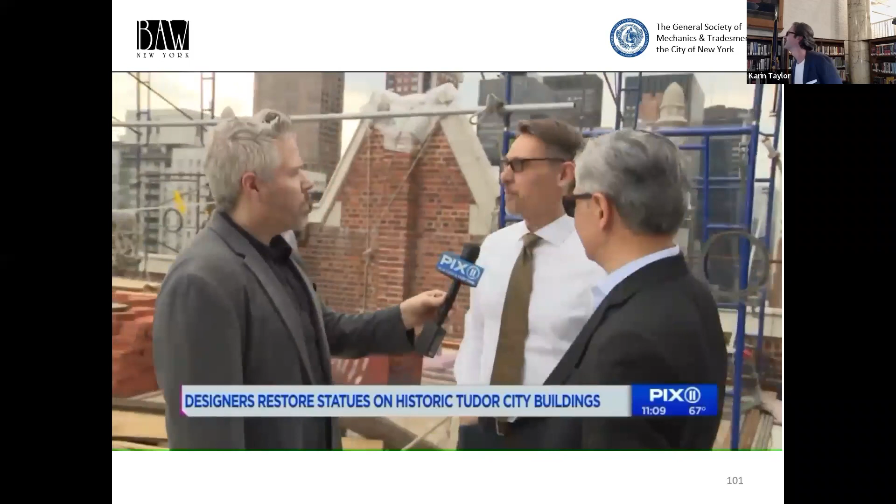This gives us one of the best vantage points of all of the buildings that we've been working on. We're sort of like building doctors. Our profession is architecture, and there's a lot of work around New York. We're at a specific moment in time where all of these are hitting a certain vintage, and we're seeing that we're replacing more of the original fabric than we had to in the past. This is a perfect example where these statues have been here for 90 years, and finally we've reached a moment where they needed to be replaced.

Oswald Bertolini and Eric Vonderhyde—check out the work of their firm, Bertolini Architectural Works. They're restoring certain exterior sections and structures of three Tudor City buildings, including nine statues. One of the most exciting things for me is climbing up there, being with the workers, checking the conditions, and then seeing as they build it.

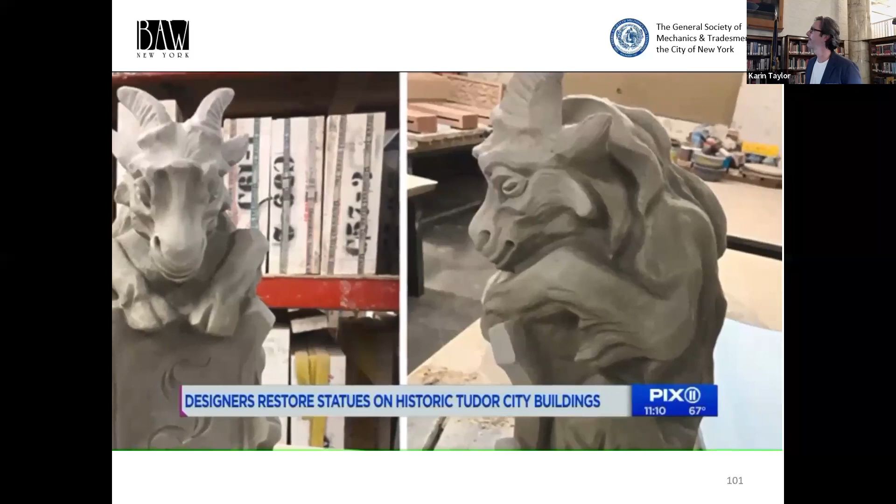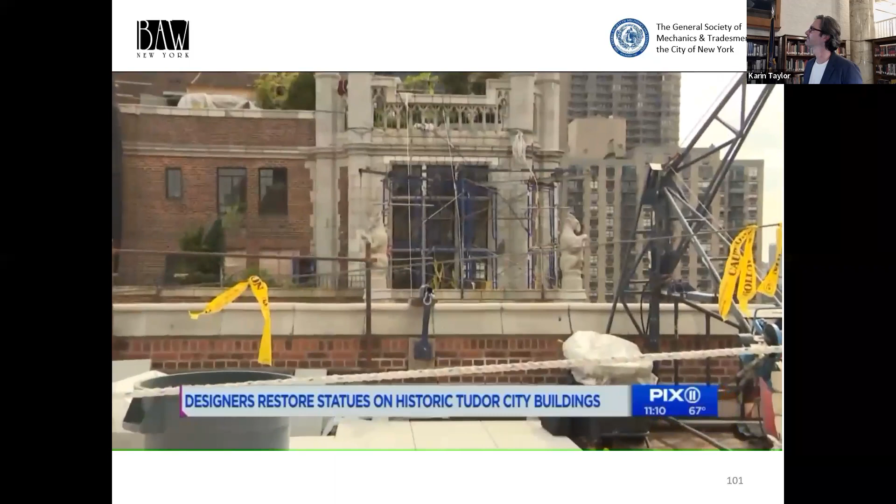The new figures were fabricated at Boston Valley Terracotta in Orchard Park, New York. It's closer to Buffalo than it is to New York City, but the pieces fit right in. When possible, original masonry is used as a reference. Gargoyles and statues have both a design and structural function, helping direct water sometimes. They add to the view, or maybe even preserve the good luck of a place.

What we have to do when we rebuild these things wholesale is make them watertight, integrate new technologies, but still have them look exactly like they did before. These guys will be watching over the neighborhood at 2nd Avenue and 42nd Street in Manhattan well into the next century. In Tudor City, Greg Mocker, Pix 11 News.